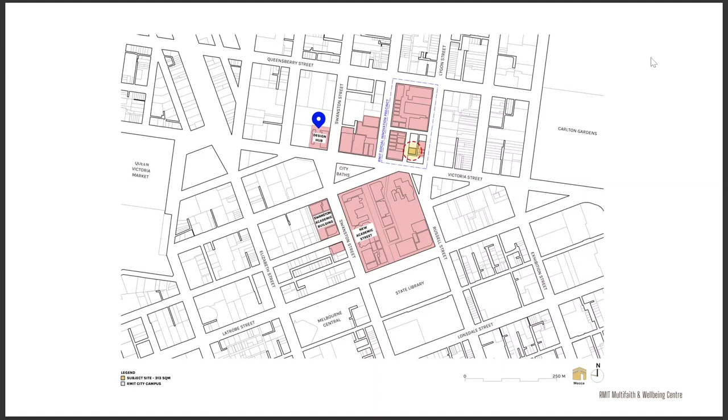Our design intention was to create a dignified building that spoke of quality and timelessness, coming down to these 3 main ideas: the concept of architecture as a monolith, and the idea about the monolith and representation and spirituality, something we've explored on several other religious projects as well.

From this, elements could be subtracted. The commitment to draw on history and narrative of religious buildings in form and materials, to utilise penetrations of controlled light and frame views into and from the spaces.

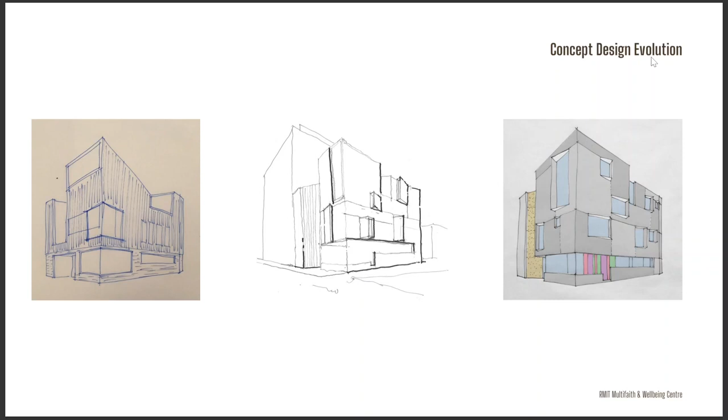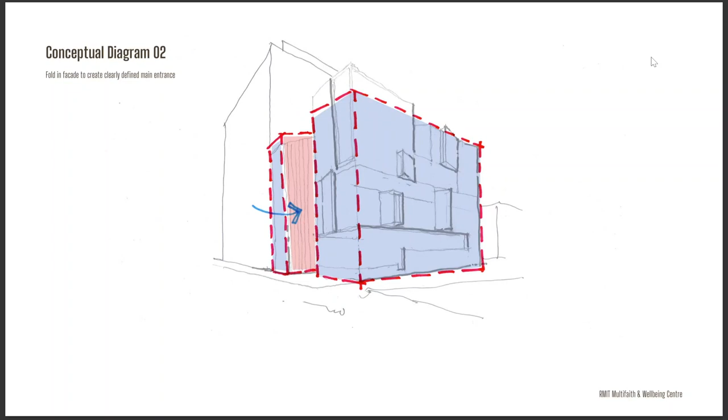With the development of this concept, we explored the following ideas: 3-storey massing based on program, budget and constraints provided by RMIT; subtracting or excavating the facade to create clearly defined entry, offering shelter and public movement.

We conducted extensive consultation with more than 20 faith, wellbeing and cultural groups to establish a detailed brief covering functional and aspirational needs. We looked for potential usage overlaps and innovation opportunities.

We talked in detail about the practice of faith, and these insightful discussions informed our program resolution, enabling us to optimise the centre's capacity while thoughtfully navigating the conflicting requirements of each group.

Although no longer the sole function of the building, a significant portion of the floor area is utilised as Muslim prayer spaces.

Interestingly, despite the growth of the Islam faith in our multicultural society, there are surprisingly few prayer spaces or mosques within the Melbourne CBD. Unlike Christian faiths that generally congregate weekly, Islam is the most demanding in its day-to-day practice, requiring 5 prayer sessions every day.

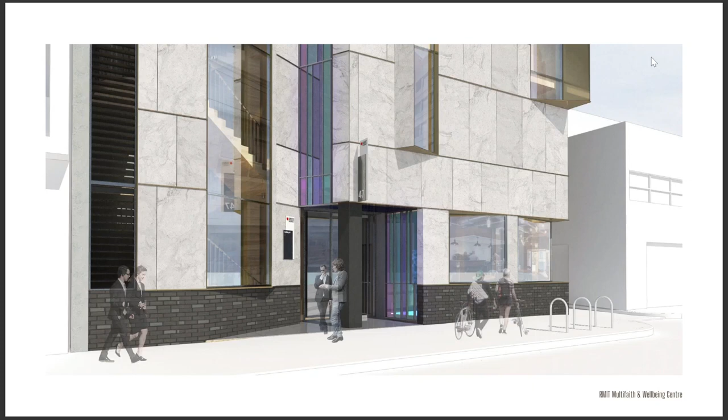Our architectural response enabled varied uses to occur in accessible, adaptable spaces, subtly tailored to accommodate critical liturgical and user requirements without giving prominence to any particular faith group or activity group.

We explored spatial arrangements, grouping functions and arranging them across the 3-level building.

One request in the brief was to provide generous circulation spaces that encouraged casual lingering and interactions.

Semi-dedicated prayer and ablution spaces with capacity for expansion during festivals such as Ramadan.

Multi-purpose space, maximising the number of diverse groups using the building, which was critical given the constrained site and the budget and ambitious utilisation goals.

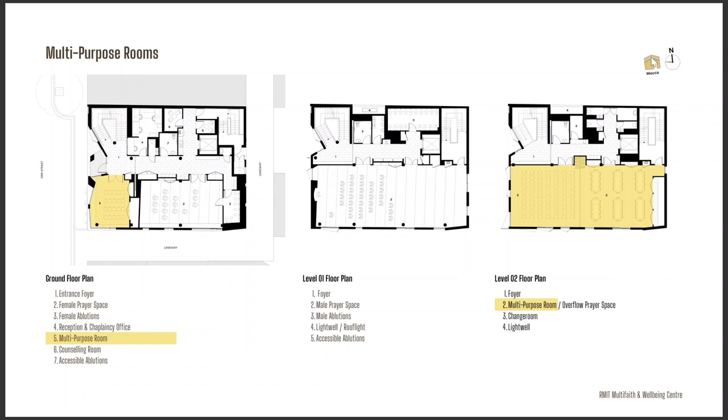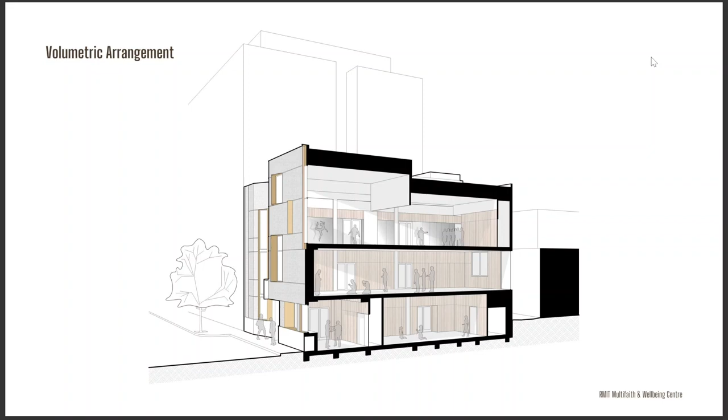So the building itself, we've used stone cladding referencing monolithic structures and bronze shrouds hinting at religious art and architecture throughout history. We've recessed the entry, providing shelter and relief from the street.

Internally, the foyer is an open, vertical space with a generous winding stair and a prominent reception.

The materials we've used convey a sense of monumentality and gravitas through the raw, untreated finishes of the concrete and timber.

We've used coloured glass to imbue the spaces with warmth and changing light.

And we've created a modern, adaptable interpretation of the traditional prayer space, using banded carpet orientated towards Mecca and indicating the direction of prayer. The mihrab, from where the Imam leads the prayers, is orientated towards Mecca and lined with tiles.

The smaller female prayer space is located, on request, in a more discreet location.

The main multi-purpose space and overflow prayer space is on the top level, utilised by an incredibly diverse range of activity, faith and cultural groups, meeting their varied functional needs and able to be divided in half. The smaller multi-purpose space is visible from the street and is arguably the most adaptable space, capable of opening out onto the main foyer.